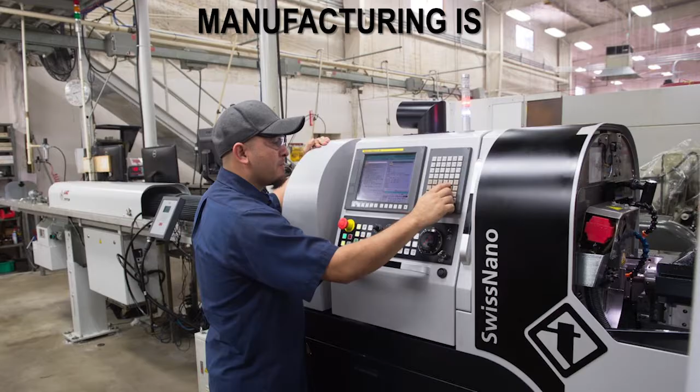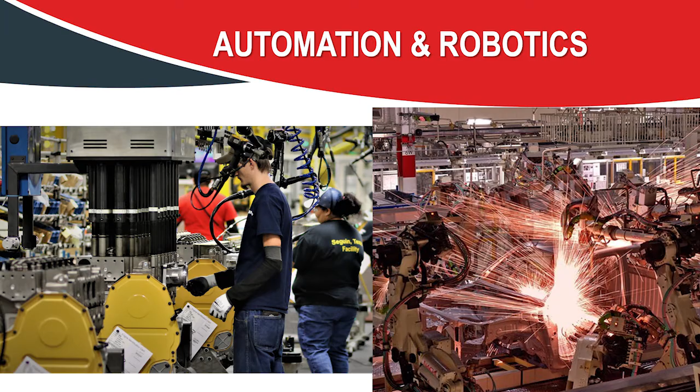Manufacturing plants today are clean, modern, and utilize advanced technologies in their production processes. With the use of automation and robotics, manufacturing plants are state-of-the-art plants where people can work in safe and healthy conditions. Manufacturing Day is manufacturing's biggest annual opportunity to inspire the next generation about the industry and careers in modern manufacturing. Supported by a group of industry sponsors and co-producers, Manufacturing Day is designed to amplify the voice of individual manufacturers and coordinate a collective chorus of manufacturers with common concerns and challenges.

The rallying point for a growing mass movement, Manufacturing Day empowers manufacturers to take charge of the public image of their industry and come together to address their collective challenges, such as the skilled labor shortages they face. They do this so they can help their communities and future generations thrive. As a perspective, and according to the National Association of Manufacturers, currently there are nearly 900,000 open jobs in manufacturing and 4 million expected jobs to be filled between now and 2030.

According to research by the Manufacturing Institute and Deloitte, manufacturers must accelerate their efforts to attract and support manufacturing talent. The majority of our regional manufacturers have positions to fill as well, and they too must have programs to attract and support manufacturing talent. Many manufacturing executives nationally, according to CreatorsWanted.org, and within SAMA agree and highlight that manufacturing is what drives everything we have. If you look around, how much of that has been manufactured? Almost everything. Manufacturers work on big challenges, fixing something, finding the answers to puzzles on how to make things and the processes to do so. These get done because manufacturing workers are doers. There is something tangible and wonderful about the business of making things.

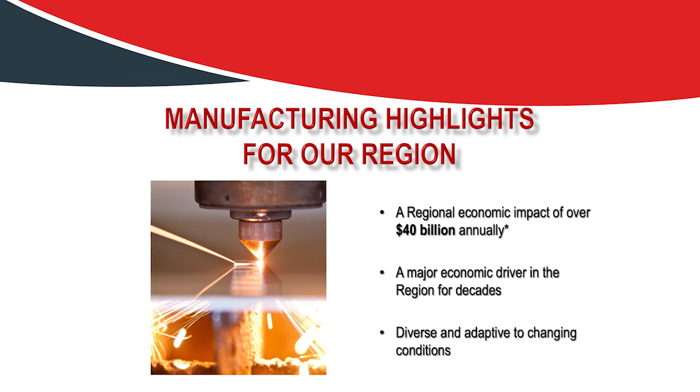Manufacturing in the area is very diverse, spanning virtually every industrial product line. Principal sectors have grown and evolved over time in response to national and global changes in the manufacturing environment. Our manufacturing industry sectors comprise the following. Transportation. This sector is our largest and consists of aerospace and motor vehicles.

Equipment and metal products. It is followed by machinery, computer, electronic components, primary and fabricated metal products, repair and maintenance of machinery, and electronics. Diversified products, which includes printing, food and beverages, textiles, apparel, and leather, furniture, and miscellaneous products. That includes medical equipment. Materials and electricity consist of wood, paper, non-metallic products, petroleum, plastics and rubber, chemicals, and electricity.

The manufacturing industry sectors comprise 32.4% in transportation, 24.6% in equipment and metal products, 21.9% in diversified products, and 21.1% in materials and electricity. Additionally, there are 1,500 plus manufacturing companies in the region. 80% of them employ less than 50 employees, and transportation and equipment and metals are the leading sectors.

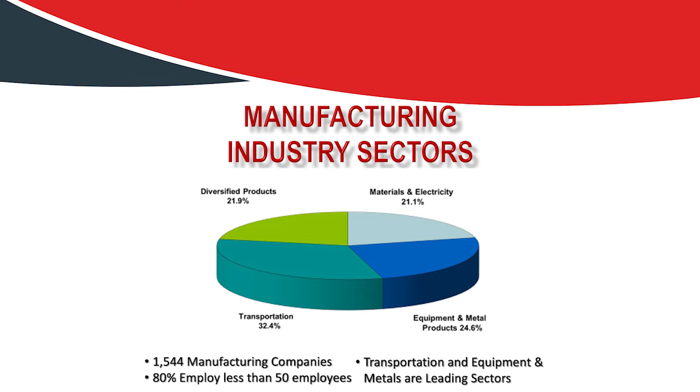In 2016, a total of 52,000 people worked in the manufacturing industry, constituting 5% of the total number employed within the San Antonio metropolitan area. Of greater significance than the overall headcount is the steady evolution of manufacturing job opportunities away from low-skill sectors of the economy and toward high-skilled, high-tech sectors.

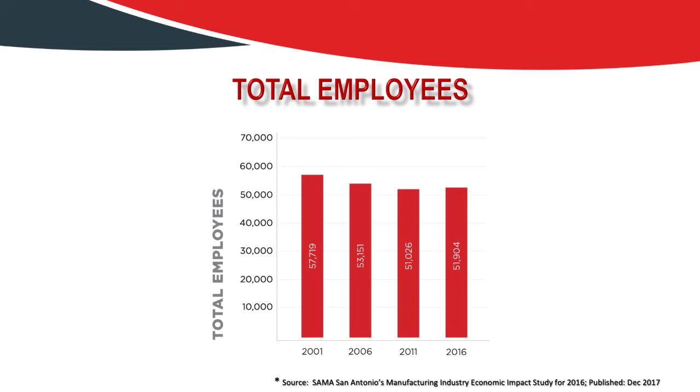This has resulted in significant wage gains as the manufacturing workplace has evolved to meet the increasing technology demands of the industry. Over time, there have been significant decreases in employment in diversified manufacturing, largely offset by gains in the transportation sector. Advanced manufacturing technology has changed the face of manufacturing, increased the use of robotics and automation that include transportation and equipment and metal products, diversified products, materials and electricities to ensure future skilled advanced manufacturing workforce for industry.

SAMA Partners have introduced programs in place with FIRST Robotics. They introduce robotics from elementary to high school students. The Alamo FIRST area serves teams in Central and South Texas. Our mission is to inspire young people to be science and technology leaders by engaging them in exciting mentorship-based programs that build science, engineering, and technical skills that inspire innovation and that foster well-rounded life capabilities, including self-confidence, communication, and leadership. For more information, go to the website listed below.

A-Teams is a result of the merger of the A-Team, the Alliance for Technology, Education, and Advanced Manufacturing, and SAMSEC, San Antonio's Mathematics and Science Education Coalition. Together, they highlighted major challenges were on the horizon at both local and national levels due to the shortage of younger workers entering the highly skilled manufacturing trades.

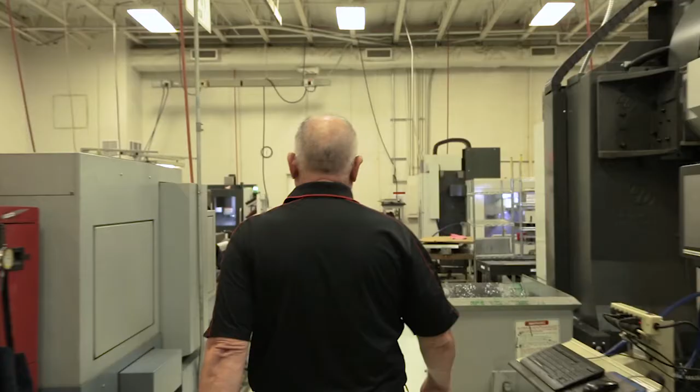I'm Doug Carlberg, CEO and President of M2 Global Technology, and here with me today is our Chief Financial Officer and Director of Human Resources, Patty Meisenslager. We would like to welcome you to M2 Global Technology, where we design and build radio frequency microwave components and systems. These designs are used in radar, communication, and satellite systems. Also housed in this building is our state-of-the-art aerospace manufacturing plant, where we take raw materials such as aluminum, steel, and titanium and transform them into final products. These precision parts are used in aircraft, helicopters, drones, and missiles.

In this video, you will get a virtual tour of our factory and get an inside look at what makes M2 Global such a trusted supplier of high-quality microwave components and aerospace precision parts. We excel in manufacturing a high mixture of products and parts using small production lot sizes. How do we do this? Simple. We have taken the Toyota production system and applied it to this high-mix, low-volume model. We call it M2 Global Production System. Patty, let's start the tour by going to our lobby. All right, let's go.

Here we are at a picture of Doug holding a high-power aluminum microwave waveguide section that is installed on a nuclear aircraft carrier. We are among a select group of suppliers that have certification to supply this product. This is just one group of products that we supply to our Department of Defense customers. M2 Global is classified as a small business administration, service-disabled, veteran-owned business. Matter of fact, we're 100% veteran-owned and 24% of our workforce are veterans. Patty, can you tell us how we develop our high-performance teams? Sure. Let's go to our Executive Leadership Team Board.

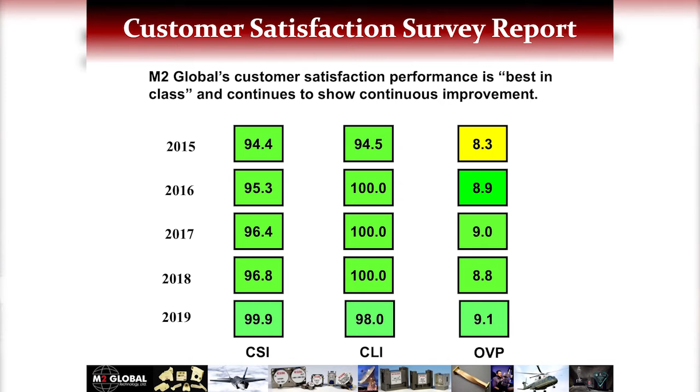One of the things you'll note here is that we've had a slight drop in overall customer loyalty, and that's because we have one customer that uses us to train their new buyers. And we got a brand new buyer when we did the survey. And guess what? He didn't feel comfortable rating us. That's okay. That customer loves us. And we continue to get new buyers because he thinks we're a great training ground.

On our executive team board, we talk about our strategic plan. We had 4 focus areas. One of them was creating the team-based culture and establishing a lean enterprise. Let me tell you how we did it. This is an example of our lean journey board. We had to go back and take a look at how we can develop and implement the Toyota production system into a high-mix, low-volume job shop. We gave this a lot of thought, and this is what we came up with.

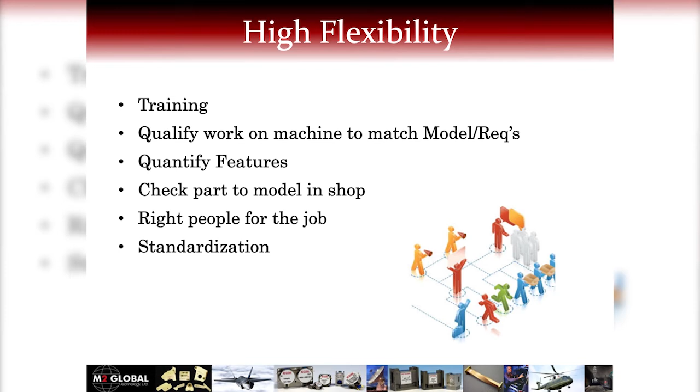Moving forward, how do we reduce our lead times? We knew we had to keep the equipment up, so we established total productive maintenance. We established setup reduction programs. We updated our value streams, and today we have 4 major value streams within M2 Global. We also realized that we needed to have the material just when we needed it, so we established just-in-time material management. And here again, we had to optimize the process across the board.

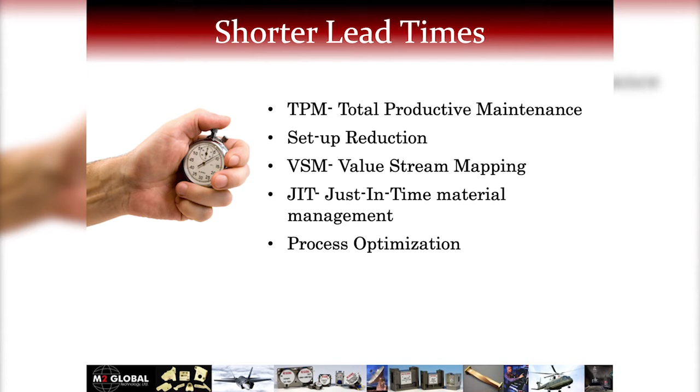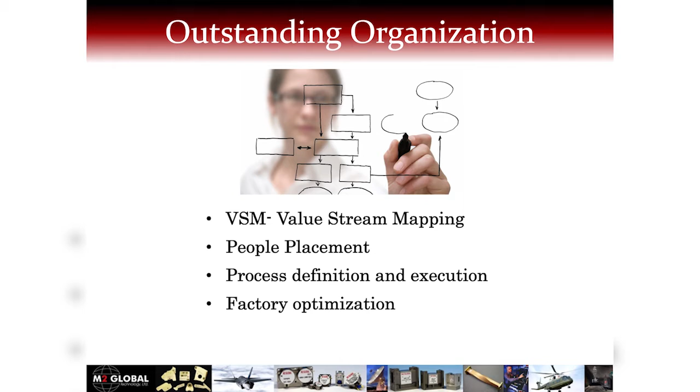How do we get an outstanding organization? Here again, we went back and looked at our value streams: people placement, process definition and execution, and factory optimization. We rolled all this up, and then we're applying it and how we would implement it within our plan for the year. With this, we had to load it into our M2 Global production system, which is our house of lean with all the tools in our toolbox. And we'll be talking more about that as we go through and do Kaizen events.

We also had to go back and look at the 5 principles of lean, which is basically, we need to specify the value. That's why we do value streams. We had to identify the value streams. We had to make the value flow. We had to let the customer pull that value. And at the end, we needed to focus on continuous improvement.

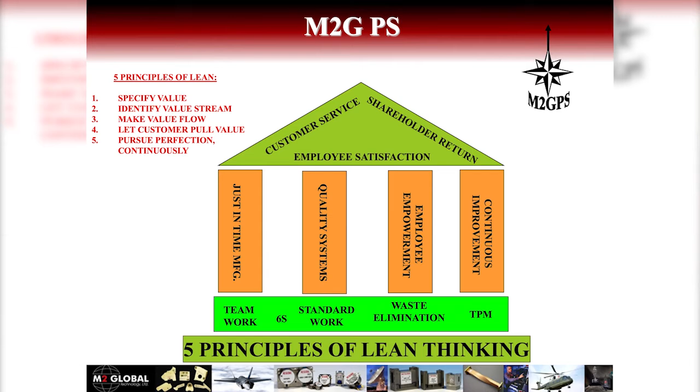To make these projects, and we'll be talking more about Kaizen events, we came up with a very simple reporting structure. As is, to be. The opportunity, what did we do, what was the effect?

Very simple report outs, the teams do it, and we do multiple Kaizen events on a weekly basis. Let's go forward to the next station. Now, let's hear about our safety and housekeeping 6S program from Eric and Tiffany.

One of our key lean tools is our 6S program. This tool plays an important part in our house of lean. We have taken the traditional Toyota 5S program and added safety, which we deem to be critically important. We do quarterly audits and engage our team members in the process. The audits are scored from a low of 1, which is an initial effort, to a 5, which is excellent habits.

To assist in the program, we've installed floor tiles in all the production areas and added casters to equipment, cabinets, and workbenches. This allows the floors to be easily cleaned. This has greatly improved our preventative maintenance and safety programs. To keep focus on safety, we have added safety as the first topic in our daily stand-up production meetings.

We use standard work to discuss the following topics: safety, quality, production plans and issues, maintenance. Next, we debrief what happened yesterday, what went well, what did not go well, what can be done differently. This has resulted in M2 Global not having a lost time accident in over 10 years.

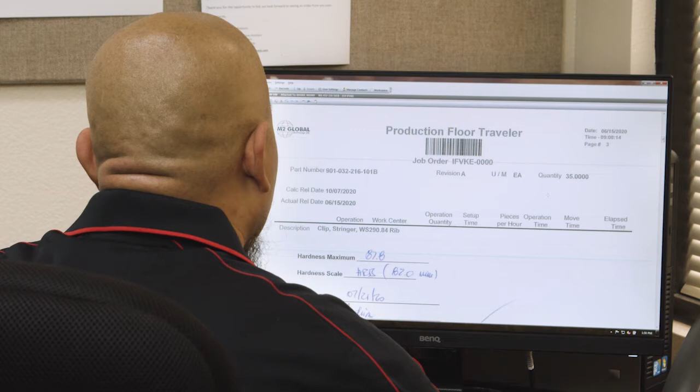For example, I am going to search an order from a customer that we have scanned into ET-File. Here is the order. It would show step by step what they did, cert numbers that are tied to the material, when it runs to the machine shop, when it was completed. We also have quality records tied to the order, which I will show here.

These will be the quality records, drawings of the parts, also we have certs for outside processes that need to be done to the parts. Thank you, Mark. The benefits of this system are we have a centralized source of frequently used documents. We have a single point of access for the latest revisions of documents.

It allowed AS9100 procedures and work instructions to be maintained in the latest PDF format, and document titles could be easily searched through Internet Explorer. This Kaizen event saved us countless hours in managing and storing our front office documents. Now let's walk through our engineering and purchasing department and head to our quality lab.

Here we are in the quality lab with Dean, Adrian, and Wayne. This is where we ensure our highest level of quality, not only for incoming, but outgoing quality. Dean, can you start? When you participate in the aerospace industry, the ISO 9001 quality standard is not good enough. We have to hold ourselves to a higher standard, and we demonstrate this through our AS9100 certification. AS9100 is based on ISO 9001, but adds additional requirements to ensure that we meet our customers' requirements.

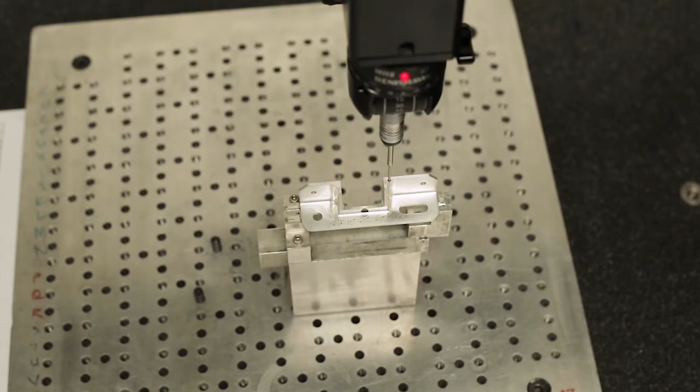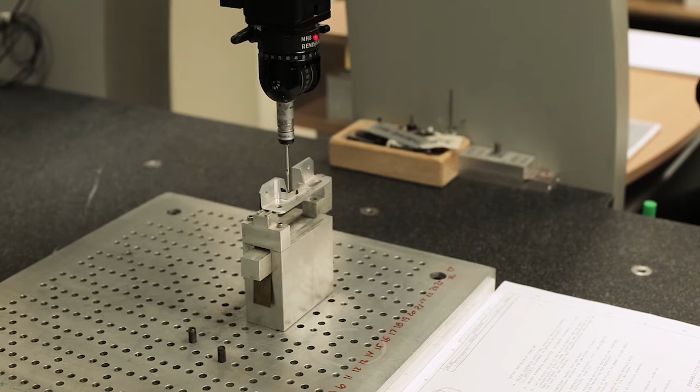Dimensional analysis inspections are one of the most important tasks of the department. The data is used for first articles and to ensure that each part is produced to specifications. Here, you see Adrian inspecting a part, verifying that the part has been machined to the precise specifications of the engineering drawing. Being able to read and interpret geometric dimensioning and tolerance GD&T drawings is critical to this position.

Not only do you need to be able to interpret the engineering drawings for the inspection, but as a quality control engineer, you also act as a technical resource to the production department. Next to Adrian, you see our coordinate measuring machine in operation. The CMM provides high precision and accuracy while making the quality control department more productive.

It's easy to see the value of having a precision instrument such as the CMM, but it takes extensive training to learn how to program, and it cannot be relocated to where the part is being machined. So here you see the next step in our journey, the portable handheld CMM. Alberto, a quality engineer, is inspecting a part, and if you look closely at the monitor, you will see that he is being shown where to place the probe. He's walked through the inspection process.

This instrument still must be programmed and will require someone with GD&T skills and comfortable working around technology. But once the program is established, we can have many of our talented employees inspect parts by following the prompt. The instrument is interfaced, automatically downloading inspection results for quick examination and inclusion in job order travelers or first article packages.

We can also provide close support to the production or engineering research and development departments by locating the CMM at the CNC tool. Now Alberto is going to show you how the tool actually works. Once we have the data loaded into our system, now we can proceed to inspect.

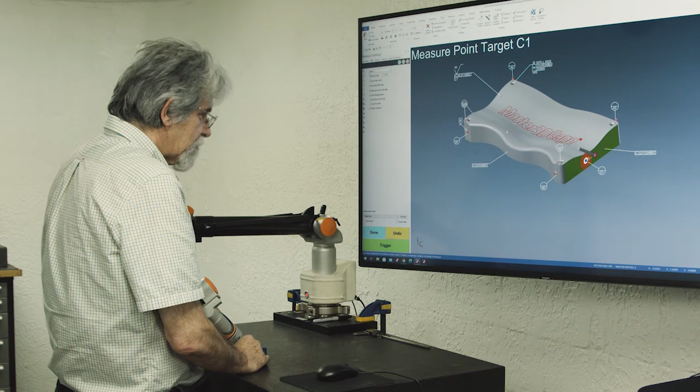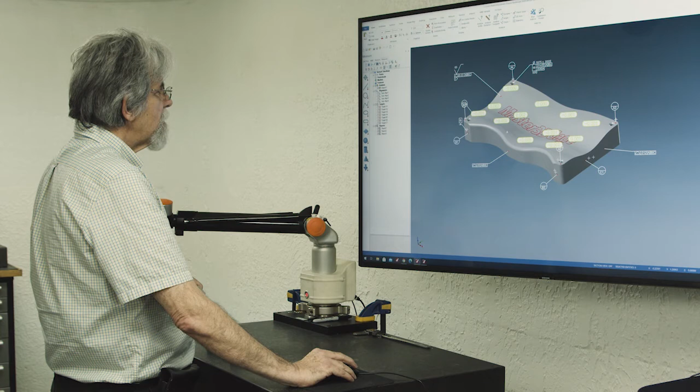Once the part is aligned, it will give you the deviation between the profile of a surface to where we can create points. And then from these points we can create a report and present it to our customer. And that's our report. Here at M2 Global, building in quality is the foundation of our lean deployment.

Now we're out here in the factory in front of our production status board. Mike, can you tell us how we track and prioritize our work? Mounted on the wall behind me is our visual control board for the manufacturing area. It is strategically placed by one of our clocking terminals. This allows our employees to view their job priorities by work centers when they are clocking in or logging onto their travelers. The visual board is organized by work center, and each job order in those work centers is prioritized by a due date. Each work center shows all job orders in that cell, and its status is color-coded to help the employee visualize his or her priority.

Can you tell us what the color codes mean? The brown indicates a job order with significant quantity of material to be issued. Yellow are job orders that require outside processing. These jobs take longer and therefore have priority. Red indicates jobs that are not moving and require management attention. The control board also helps to identify bottlenecks or idle work centers by the amount of work currently staged in that work cell. We can then adjust our manpower to focus on these areas that require more attention.

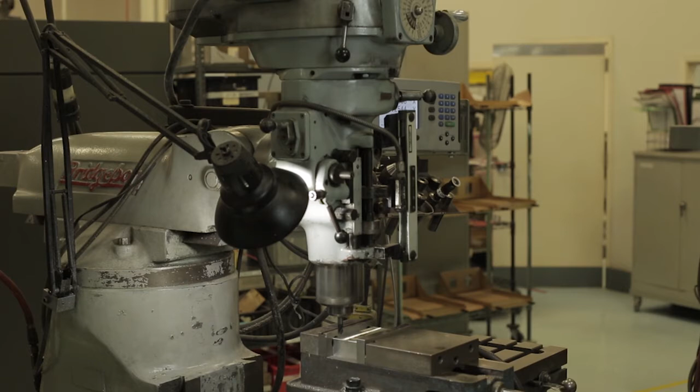All machinists would begin an apprenticeship on machines like a drill press and work their way up to understanding the fundamentals to master the operations of all the equipment in this cell. You can see this cell consists of manual mills that have 3 axes of travel and only allow one operation to be done at a time, which becomes very time-consuming by today's standards. Over here we have a manual lathe that only has 2 axes of travel with limited tooling and would result in multiple setups.

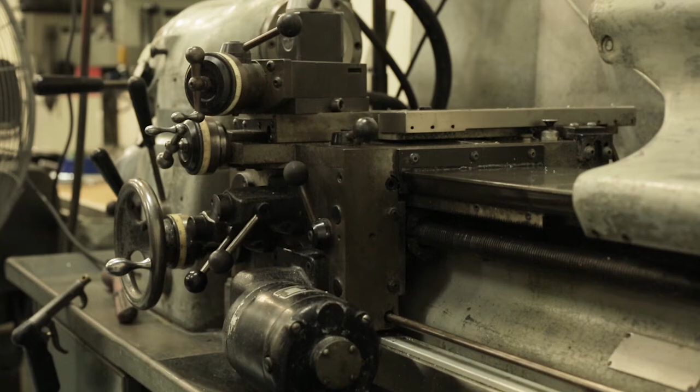A tool grinding machine here that was used to make custom tooling in-house, but with better technology and the help of computerized machining, the need for custom tooling has drastically decreased. Lastly, a surface grinding machine that was so vital in the past to achieve a perfect finish can now be achieved using modern tooling in our computer-controlled machining centers, thus eliminating the extra processing steps.

In today's manufacturing, these machines are now used in a support role to finish certain features or operations that cannot be finished on a CNC machine. These are still important machines in manufacturing and will remain so for many years to come.

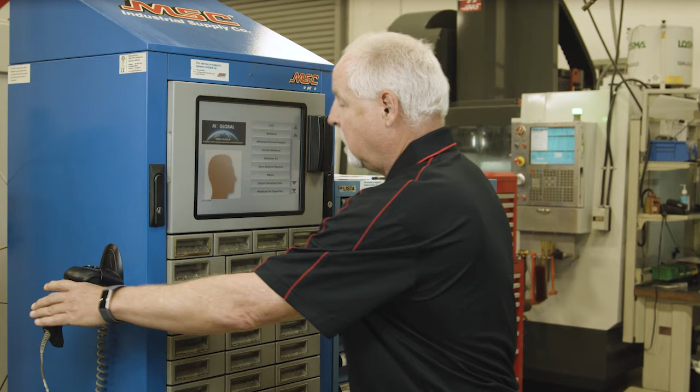Today I'd like to talk to you about a setup reduction Kaizen we did. So when we go to set up our CNC machines, the first thing we need to do is look at our setup sheet, which tells us which tools we need to run the job. So after I do that, I come over here to our machine and I'll select the tool that I need. So using my personal ID code, I access the machine and I withdraw the tool that I need.

So now that I get my tool out, I'm ready to measure. One of the things that this helps us do is it keeps an inventory of our tool usage. And when we reach the min that the tool is set for, it generates a report that goes to our purchasing agent to reorder tools. So now that I have my tool, it's time to go measure.

So now that I've selected the tool from the tool vending machine, the next step in our setup process is measuring it. So we used to do this on the machine itself. We would take this tool setting gauge, place it on the table of the machine, and then put the tool in the spindle and bring the spindle down until it touched the gauge, and we would use the machine positioning to determine the length of the tool.

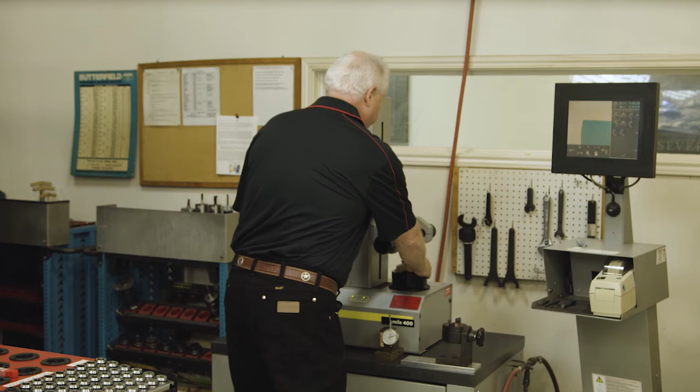Now we're doing this offline. I come over here to our Zoller tool setter, I derive my measurement, and then I repeat the process until all of my tools are set. And then when I'm done, I transfer all that data down into the machine itself. Now doing this saves us 384 hours a year of capacity. And that's for one machine, and we have 7 machines. Also, these machines only make money when they're running. So the faster we get them running, the better.

Now that we're in our CNC machining bay, Rodney, can you tell us about the technology we've got with these CNC machines? Definitely, Doug. Behind me, you will see one of our Haas CNC milling machines. These are manufactured here in the USA and shipped all over the world. These are the same types of machines that our local community college uses to teach basic machining, which allows students from the college to quickly transition into machinist positions.

Unlike the manual machines that we just saw, these are computer numerically controlled, or CNC for short, and these use lines of code to drive the tooling paths used to produce the finished product. This 3-axis machining center also has a 4th-axis rotary table and the ability to expand to a 5th axis. By adding the additional axis tied to the computer controls, it allows us to machine parts completely using 1 to 2 setups.

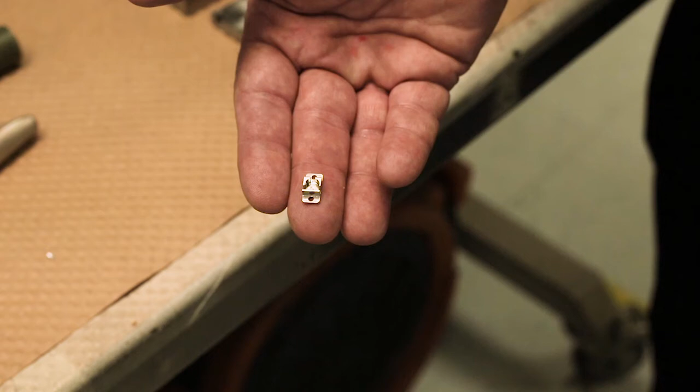Here's an example of an RF isolator housing that was machined in 45 seconds. You can see it is a complicated part with internal threads. This Swiss turning center is used to produce the covers for the isolator housing. Note the size of the threads on the side, and that allows for a perfect fit into the housing. As you can see on this table, there are machines that make these various parts.

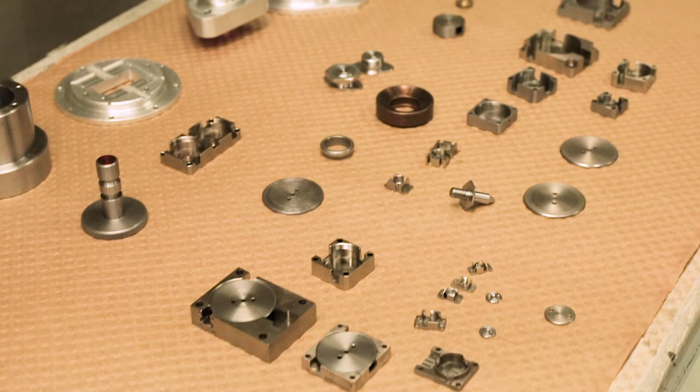Now we're in the RF assembly area where we actually will take the housings and the covers that we manufactured over in the CNC bay and bring them in here to assemble them into isolators and circulators. The isolators and circulators are some of our highest demand products that we deliver to the market. Archie, tell us a little bit about how we assemble this product.

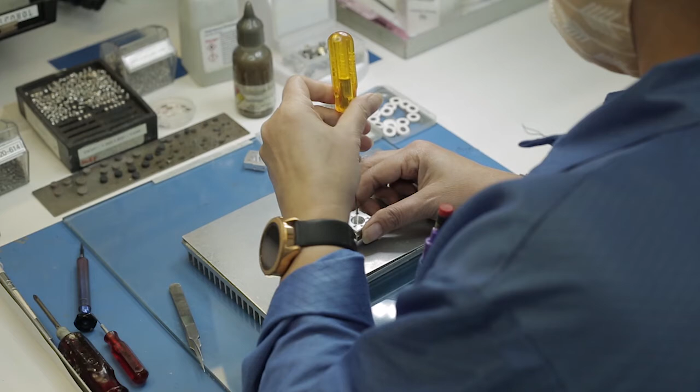Thank you, Doug. Isolators and circulators are key components of both the commercial and defense-related wireless communications infrastructures, and as such, play an important role in cell phone networks, satellite base stations, radar, air traffic control, aviation landing systems, and military electronic warfare equipment. These applications require that our products meet stringent performance standards at a very high reliability level.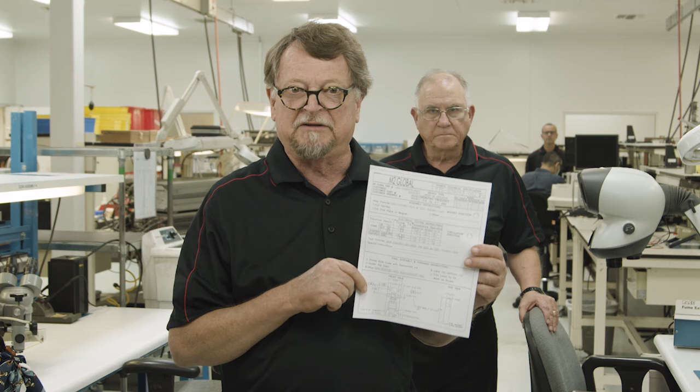In order to achieve that level of reliability, each and every one of our products is assembled and tested using a specific detailed assembly instruction, as you see here, showing all the specifications and also the assembly sequence. Once the product is assembled, it moves on to the test department. Gene, tell us how we test these isolators and circulators.

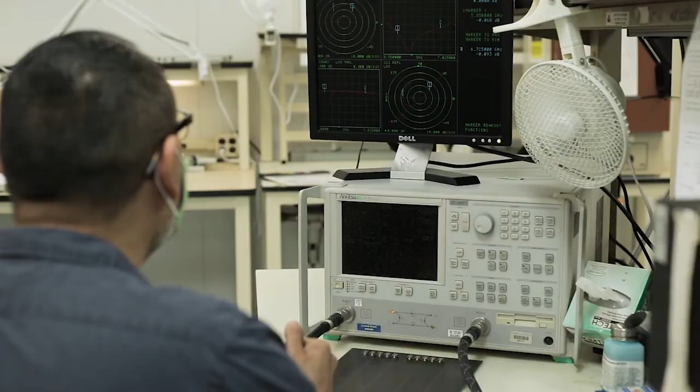The components now move on to the test station where, as mentioned earlier, every unit is 100% tuned and tested to assure the performance and reliability expected. Tuning and testing are performed on state-of-the-art network analyzers where the test technician can visually monitor the performance of the unit being tuned while applying dielectric tuning compound as needed to achieve the desired results.

After testing, the units are sealed if specified, and then all units are labeled with a part number and a date code and packaged for shipment to the customer. M2 Global offers the best warranty in the market, 2 years.

Lean is a continuous journey. Over the years, we applied for many benchmarking and recognition programs. These include Industry Week Top 20, the Texas Star Manufacturing Award, the Association for Manufacturing Excellence Award, and the Shingo Prize for Excellence, just to name a few. This has allowed us to benchmark ourselves against the best industry standards and has allowed us to set the focus where we needed to go going forward.

I remember a quote from Will Rogers: even if you're on the right track, you can get run over if you don't keep moving. I never forgot that. Doug and I hope you have enjoyed this virtual tour of M2 Global Technology.

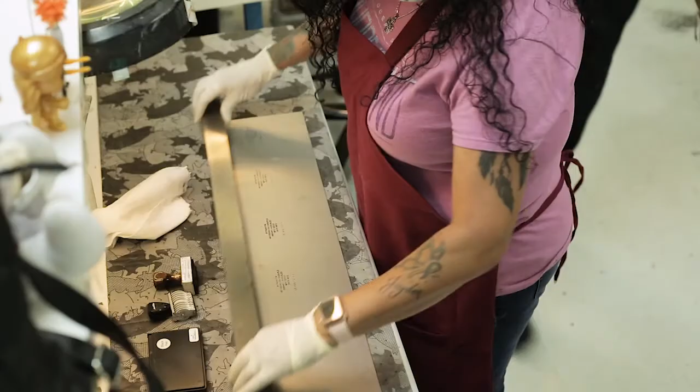I'm Doug Carlberg. I'm the president and CEO of M2 Global Technology. We're a manufacturing company here in San Antonio, Texas. And what do we do? We make aviation parts or aircraft parts for the defense industry. We really do some cool stuff here. We do a lot of parts for Lockheed Martin on their 5th generation fighter. That's the one that's going out in the field today.

The Air Force, the Navy, and the Marine Corps all have versions of this aircraft, and we make the parts right here in San Antonio at M2 Global. Lockheed Martin even brought in their cockpit demonstrator right here in San Antonio. And here is the news clip that was on the local TV station.

Take a look. Their F-35 cockpit demonstrator was on display today at M2 Global Incorporated on the Northwest side. Lockheed Martin says the F-35 is the most lethal fighter jet ever built. It can collect, analyze, and share data to help soldiers during their missions. Republican Congressman Tony Gonzales there giving the keynote address, and also he got in the cockpit as you just saw. With a great aerospace presence here in San Antonio, that partnership means M2 will be doubling its manufacturing space, bringing more jobs to the city.

We can draw more business to San Antonio. It's a great place to work. Texas, with their cost structure and no taxes, is really a great place to bring companies in. And San Antonio does a great job, and Bexar County does a great job promoting that. I'd recommend doing an internship. It's great to get hands-on experience. I've gotten a lot to learn about this industry, about aerospace, because I didn't really know too much about the aviation industry.